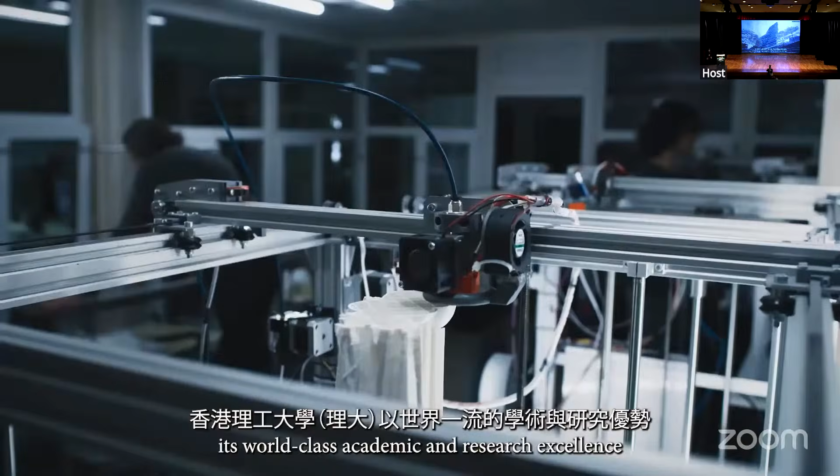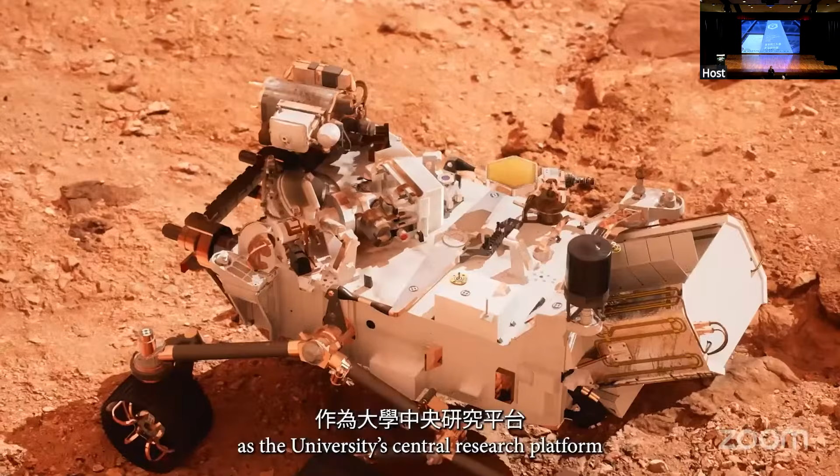The Hong Kong Polytechnic University, PolyU, leverages its world-class academic and research excellence to develop innovative solutions for a more sustainable tomorrow. In July 2022, the PolyU Academy for Interdisciplinary Research, PAIR, was established as the university's central research platform, dedicated to providing world-leading, interdisciplinary solutions to significant societal challenges.

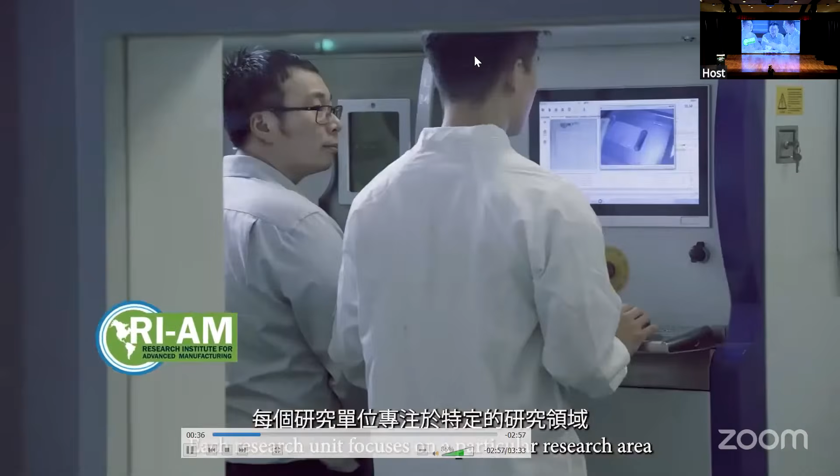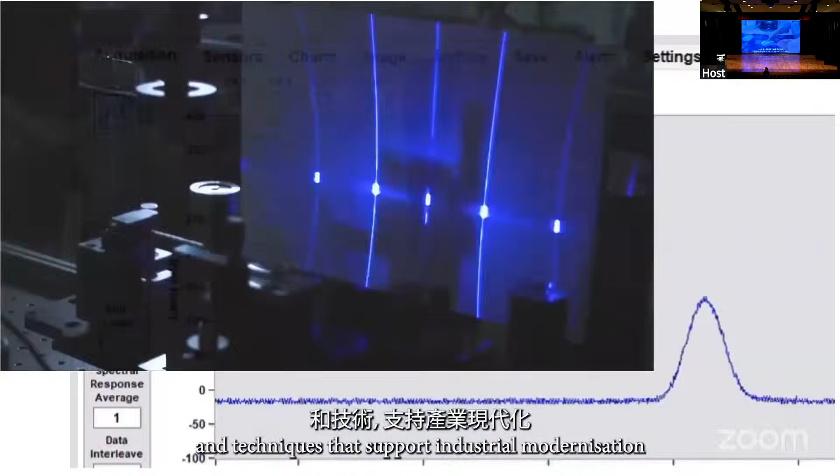PAIR is composed of multiple constituent research institutes and research centers. Each research unit focuses on a particular research area and is joined by researchers from various PolyU faculties, schools, and departments. These research areas broadly fall under three main themes, including advanced technologies and manufacturing, good health and well-being, and smart and sustainable cities. PAIR researchers develop new materials, systems, technologies, and techniques that support industrial modernization, upgrading, and transformation.

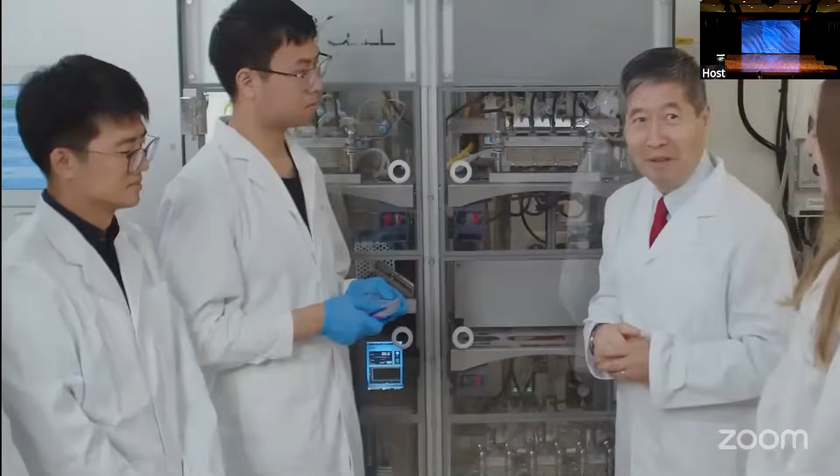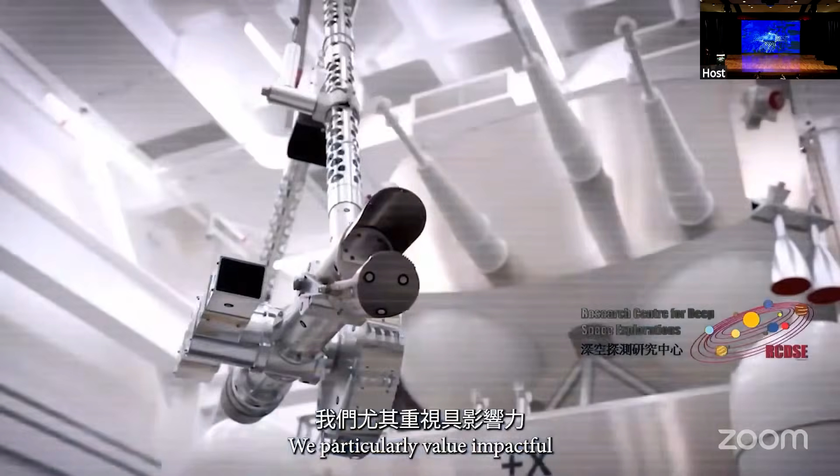They look into the factors and mechanisms influencing human health and wellness and develop evidence-based solutions, and generate smart technology-based solutions for making urban operations and services more efficient, connected, and eco-friendly. We particularly value impactful collaborative activities in research and scholarship. PAIR researchers pursue research collaboration at different levels. In addition to interdisciplinary collaborations within and between research units, PAIR and its units establish partnerships with industries, governmental bodies, universities, and other external stakeholders.

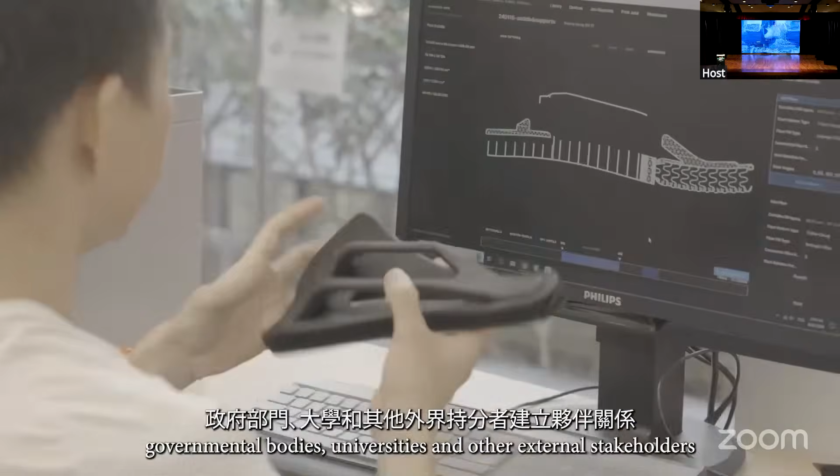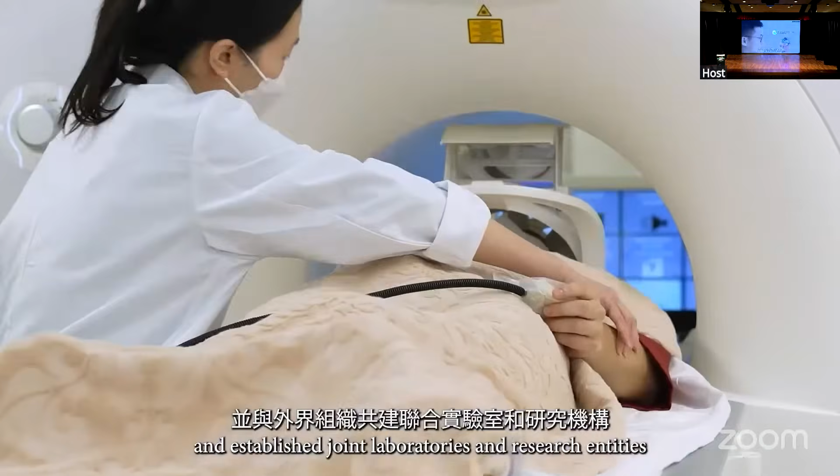With internal and external collaborations, we have successfully translated PAIR-led innovations into commercializable solutions and practical applications, and established joint laboratories and research entities with external organizations, driving scientific breakthroughs, innovation and technology development, and socioeconomic prosperity. PAIR's research excellence and research impact have been widely recognized at local, regional, and international levels. Our research outcomes have been published in leading journals, including Nature and Science.

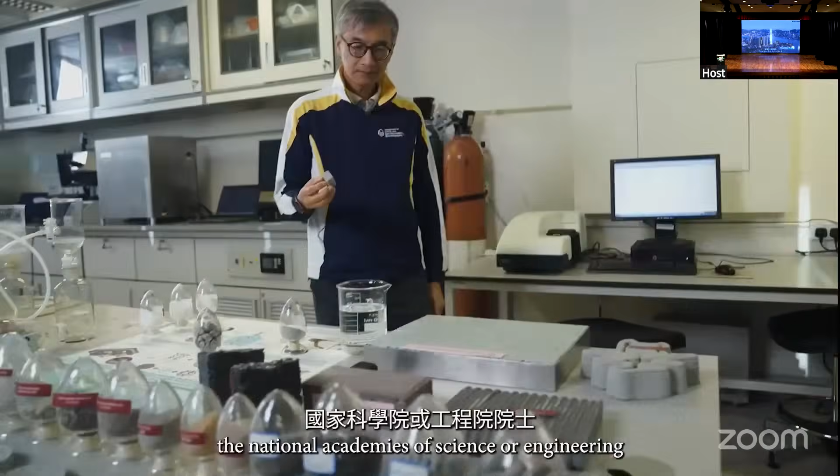Innovations led by PAIR researchers have won prizes at various competitions and events, including the International Exhibition of Inventions Geneva. Many PAIR researchers have been named among the world's top 2% most cited scientists in their own areas of specialty. Individual researchers have been selected to the National Academies of Science or Engineering and as fellows of professional associations, and have been bestowed with local, national, and international awards and honors. Harnessing the strengths of PolyU's research and world-class scholars, PAIR will continue our unwavering efforts in research and scholarship, knowledge transfer, and collaboration to develop impactful solutions that benefit Hong Kong, the nation, and the world.

Good afternoon, Professor Wang Zhonglin, Professor Wang Zuankai, and Professor Chen Qingquan. Colleagues, ladies and gentlemen, welcome to this PAIR Distinguished Lecture Series. You know that PAIR organizes this lecture series, and we often invite very outstanding academics to give lectures. And today we are very honored to have Professor Wang Zhonglin from the Chinese Academy of Sciences here. And now I would like to invite Professor Wang Zuankai, our Associate Vice President for Research, to give an introduction of our speaker. Professor Wang, please.

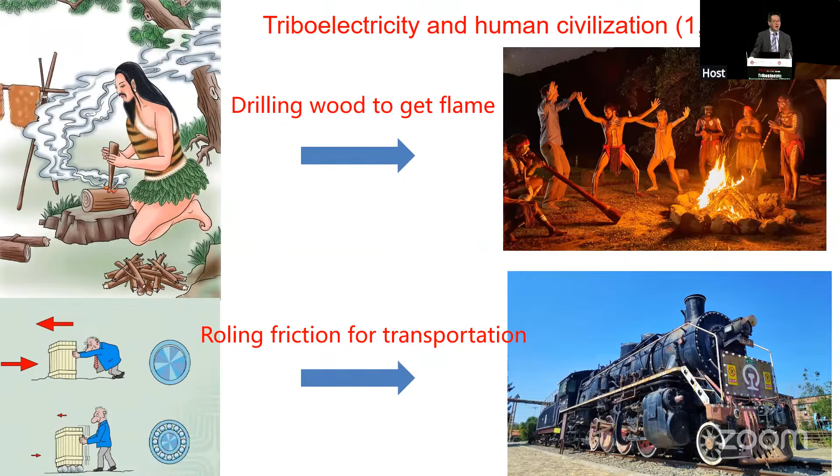Today when you talk about triboelectricity, a lot of us say, I know it very well. And of course, this phenomenon has played an important role in our human civilization, especially in the early days when we realized how to make fire, how to make transportation run smoothly. Through triboelectricity, people learned about electricity. And this is the beginning. We study static electricity, and it has been 2,600 years since the first record of triboelectricity.

And the fourth important contribution to us is you can see why flowing water will not deteriorate. You wonder about this phenomenon. Do you understand the physics and the chemistry behind why flowing water will not deteriorate? We know the phenomenon, but there's a chemistry behind it I will talk to you about today. It's just because nature moves, providing us with clean water to make sure all the humans and animals on Earth grow in health. So I will talk about the chemistry in just a second.

So this has made a major contribution to human civilization. Of course, people have studied this for decades, centuries. Because it's one of the earliest recorded phenomena, until the last 20 years or so, it had not been extensively studied because it used to be regarded as a negative effect, causing fire and other things. So people said, well, we knew it, but we don't want to study it in detail. So in the last 20 years, a lot of groups studied this in depth, especially, like the audience here, Professor Zuankai Wang's group and Professor Hao Jianhua's group, because it brings new technology and sense to us.

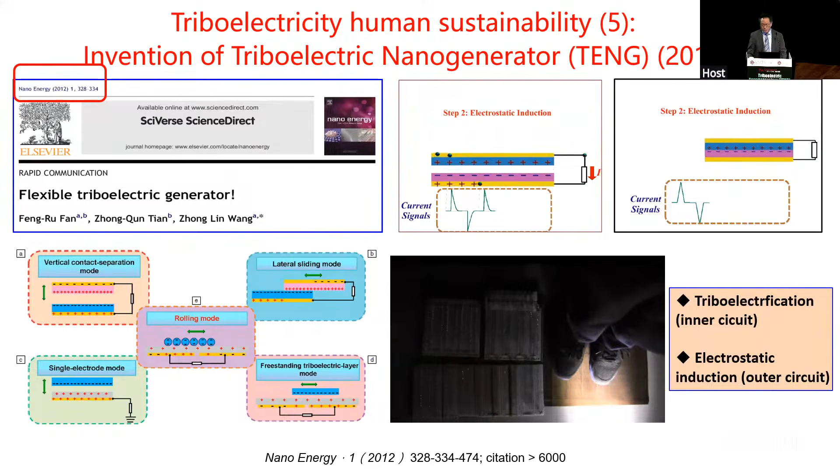We use triboelectricity as a power generator. You know that triboelectricity is a phenomenon. We used to say triboelectric discharge, but now it's triboelectric power. That's a different thing. So how it works is making two dielectric materials, one in contact with the other. So you cause charge on the surfaces. And if you use an external force to separate the two parts, you generate a displacement current, which drives the electrons to flow between two electrodes, and you give out power. So this was the beginning of this work.

Okay, up to now. So why is it different from the 200-year-old technology we have known so well? We use electromagnetic induction for power generation. This was first introduced in 1831 by Faraday, and this is the major thing we use today. Use magnets and coil. Its output voltage and current are each proportional to frequency. So the power is F squared. That means we need to run this power generator at a high pace. If you run at a slow pace, the output is very low. So it works best at high frequency.

But in our daily life, we have lots of slow motions, especially related to humans. So we use triboelectricity. It's high voltage, low current. The electromagnetic generator has high current but low voltage, just the opposite. Use different materials. TENG, triboelectric nanogenerator, uses polymer materials and contact electrification as the mechanism. Electromagnetic induction uses Faraday's law as the driving mechanism. So the fundamental mechanism changes, the material system changes, the output characteristic changes, and of course this results in diverse applications, right? So this is the basic.

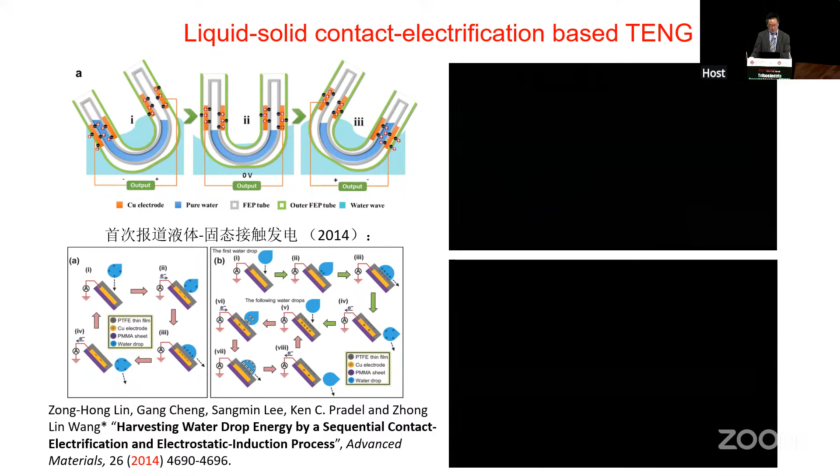And this started from a video we took. This was 2014, and at that time we used to study liquid and solid contact electrification. We found that we can have power generation, and we wrote the paper, and in 2020, Professor Zuankai Wang wrote another beautiful paper published in Nature on the liquid, with much more improved performance. This started work on liquid-solid contact electrification. Today, a lot of chemistry is being built around this. So as you see, this is the beginning study, fundamentals of liquid and solid.

Is there any charge transfer? How come a liquid droplet becomes charged? What kind of charge is it? Okay, so this is the beginning in 2014, we published the first paper on that. This goes to the fundamentals of chemistry, the so-called electric double layer. If you work on a supercapacitor, on energy storage, you must use EDL. Okay, this is the fundamental.

So it says when a liquid contacts a solid, a layer of ions is adsorbed on the surface. So our question at the beginning: is there any electron transfer? Why only ion adsorption? Is this the full model? After we studied, we found this is not the full model, but you read a lot in textbooks about that. So how do we do the study on this one?

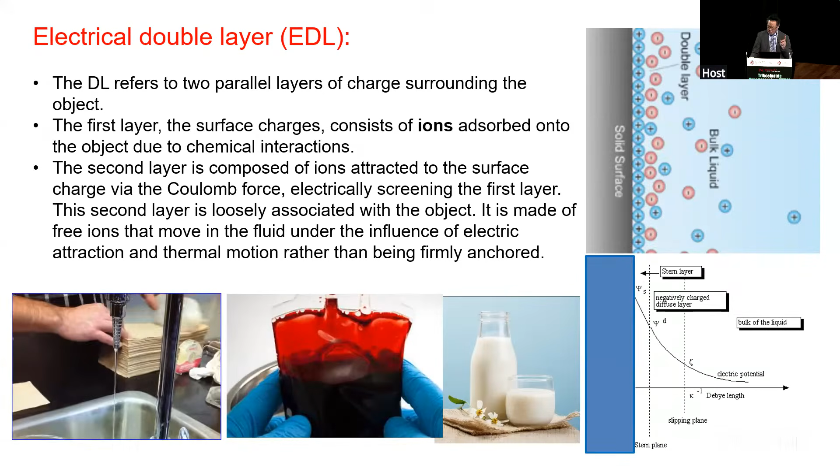You see, with the flowing water here, the charged plastic attracts it because the flowing water has charges in it. So what kind of charge is this? So we studied it in detail here. We use a silicon oxide, use thermal annealing to get rid of surface charge. Then you drop a single drop of water on that, you evaporate it. Then you measure the charge on the surface.

It suddenly drops from 0 to minus 800 microcoulombs per meter square, negatively charged. Then if you keep this stable at room temperature, it decays for a long time. If you heat up to 393 Kelvin, it drops like that, okay? But never reaches 0. If you heat to 433 Kelvin, it decays like that. So this residual charge is the ions adsorbed on the surface. The ones you got rid of by the thermal effect, called thermionic emission, are the electrons. So you can quantify how many electrons transfer, how many ions transfer.

So this is the first droplet. If you repeat this for the second droplet, you can rebuild the charge again, then after drying, you heat up to reach a new saturation. Since there are more ions on the surface, by the third droplet, fourth droplet, you reach ion adsorption saturation. So at the very beginning, if you have no temperature fluctuation, you have both electron and ion transfer. So this indicates the charge has both ions and electrons.

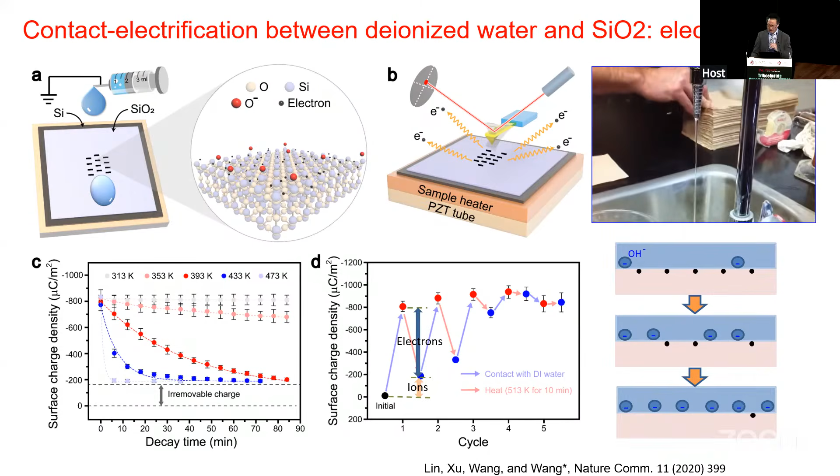But the electron transfer is much faster. Why? It only takes femtoseconds for the electron transfer from liquid to solid. Ion adsorption to the surface takes micro or even milliseconds. So much slower. Okay? So this is the beginning of our study, liquid and solid. Then you say, well, how come water loses electrons? Is this possible? We didn't believe this was possible.

But a few years ago, in this beautiful study, they used time-resolved ultrafast X-ray laser. They found water can become a water cation. The only thing is that its lifetime is on the picosecond scale, during which the water cation combines with one molecule to become a radical and another group. So water losing one electron is possible. So water is not just a solution that dilutes things. It participates in chemical reactions. We did not realize that before.

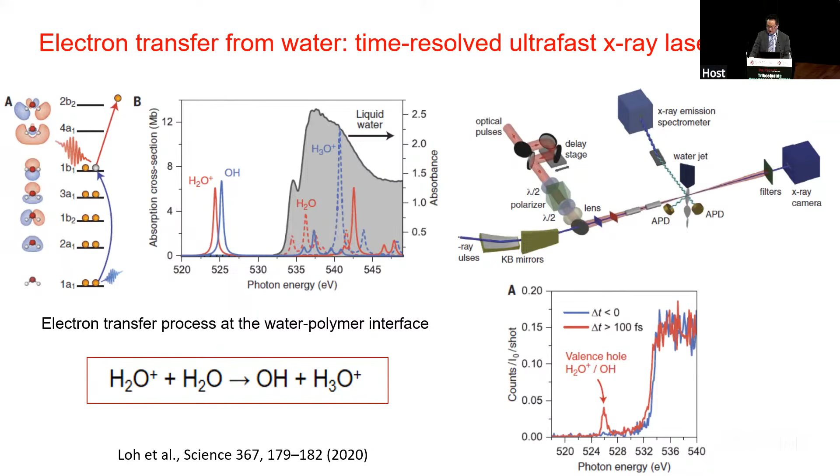Let me tell you how, okay? So this just shows electron transfer is involved in this one. As a result, if you have a virgin solid surface and put a liquid on it, first, electron transfer occurs very fast, in femtoseconds, finished. Okay, then the ions migrate to the surface to form a layer of ions. Below here is a layer of electrons and some ions. So what does this mean?

The formation of the electric double layer involves two types of charge, electrons and ions. We used to only believe it's ions. So that's number one. Number two, the formation of the electric double layer is a result of contact electrification or triboelectrification. In a solid we normally call it triboelectrification, but for a liquid and solid we call it contact electrification, which is more scientific. So this is the liquid and solid forming an electric double layer. And you can go a lot further with this study.

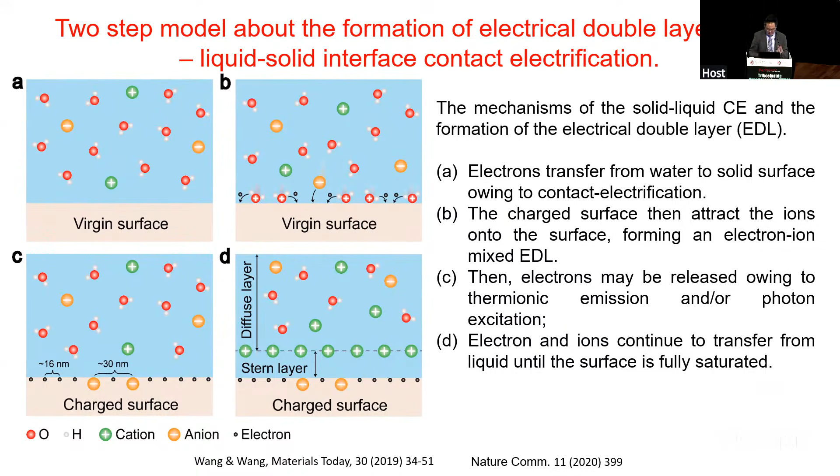As a result, you'll be able to study, if you have a droplet flowing down an array of electrodes, how to map the charge transfer between the water and the surface. How can you do that? You make an array of TENGs. Each yellow dot is an electrode. So you make a 432 array. When the liquid flows down here, you can measure the charge transfer.

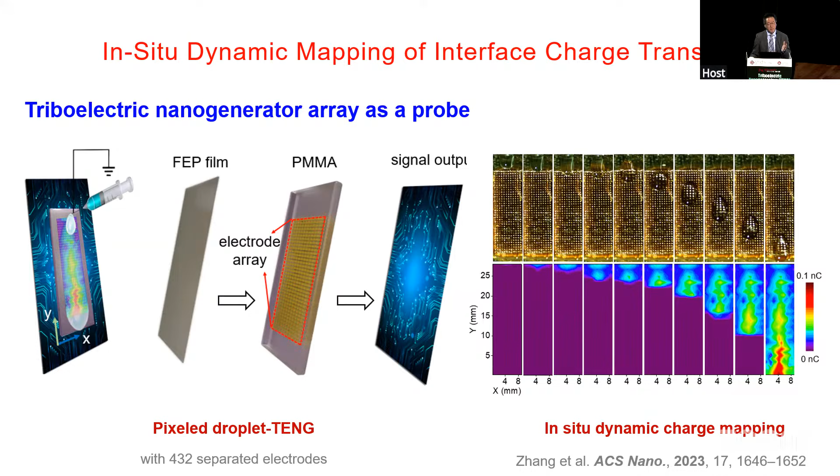So as you see, when the droplet flows down here, you'll be able to map the charge quantitatively. And you can heat it up and see how many electrons get removed. So TENG provides a new probe for studying charge transfer at liquid-solid interfaces. And I think this is important for chemistry, right?

Then why does flowing water not deteriorate?

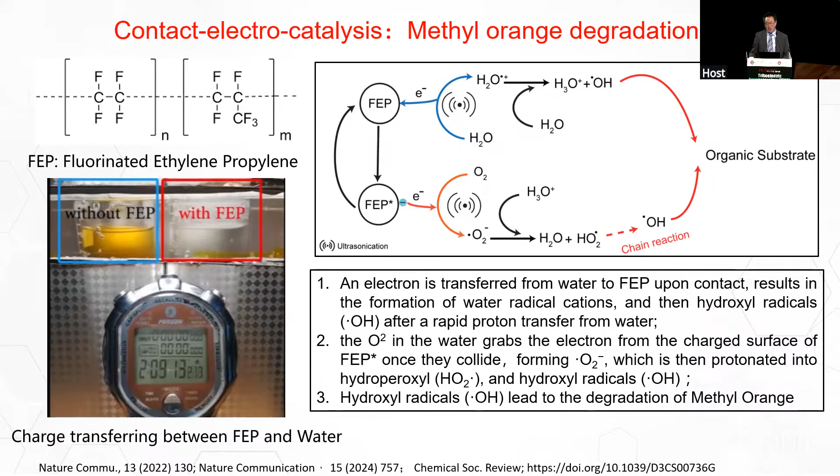You say we have photocatalysis, we have electrocatalysis. If we don't have photons, we don't have electricity, does catalysis occur? Yes, if you have motion. You have motion, it occurs. So this is why, in the evolution of our nature, a lot of things take time, because it is a motion-driven catalytic process called CEC, and this is now being widely studied. Okay, so this is the chemistry.

They ask, is the ultrasonic wave needed? The answer is it's not the only means. You can use ball milling, any physical motion, to excite this kind of CEC process. Using this process, we have recovered precious metals, recovered lithium-ion battery materials, and we also do a lot of food processing and many other things. So you can see there's a lot of work being done around the globe in this field. So this started a new interesting field in chemistry, right?

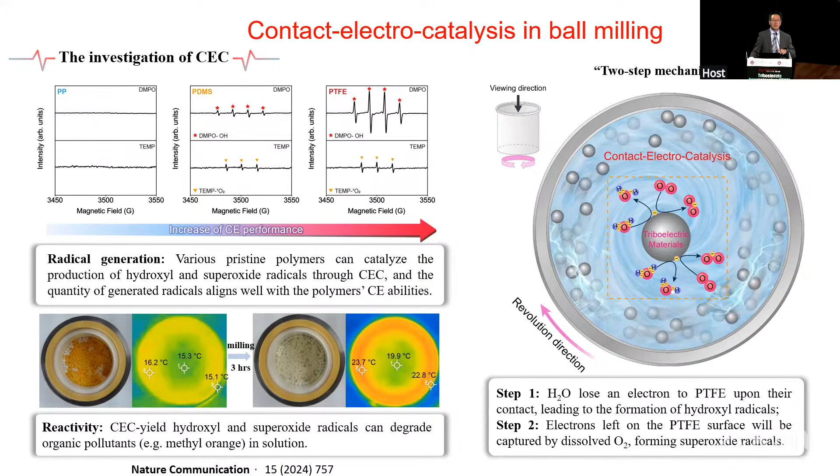Also, recently a lot of studies use microdroplets. The magic of microdroplets is the charge transfer. It's due to contact electrification. Number two, as the droplet becomes smaller, the surface charge density becomes larger, so the electric field on the surface becomes larger. That can cause some chemical reactions. But what causes this electric field is the charge transfer on a liquid droplet. So when you look at it fundamentally, contact electrification is the basic mechanism.

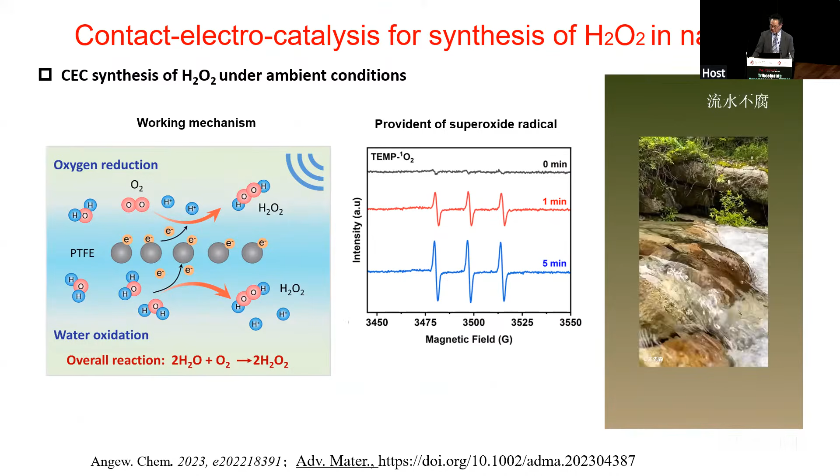All right. So now you understand why in our nature flowing water does not deteriorate, and this is the nature of clean water. Okay. So this is for the chemistry side. Now let's talk a little about physics.

Physics, first one: we knew contact electrification for a long time, but why did it happen? People doing tribology study say this is material species transfer. People doing chemistry say ion transfer. People doing physics say electron transfer. Which one is which? They have debated for many years. But in fact, we find both are electron transfer and ion transfer, depending on the environment you are involved in.

The basics: we found using AFM measurement that contact between two materials only occurs when the distance at the special region is shorter than the bonding length. Why? We measured it and found you have to be in the repulsive region. That means the two atoms have to be so close they have a strong overlap in the electron wave function. Only then does the charge transfer occur.

So as a result, we propose this potential well overlapping model. When your two atoms become so close, the barrier between the two will be reduced, so you have a strong overlap of electron cloud. As a result, you can have a charge transfer from one atom to the next one. So it's transfer and a transition. I will show you the evidence supporting this in the next view graph.

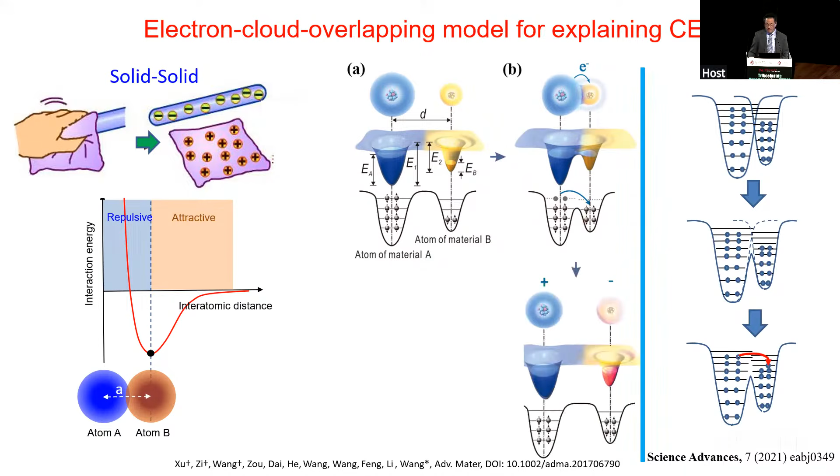Because you have a transfer and transition, you're going to have a photon emission from this transition, and we observe that experimentally. So if the charge transfer has already occurred, when you separate them, there is this negative charge and this positive charge, but thermionic emission eventually reaches equilibrium. So that's the nature of the curve. Okay, so now let's look at the evidence to support this.

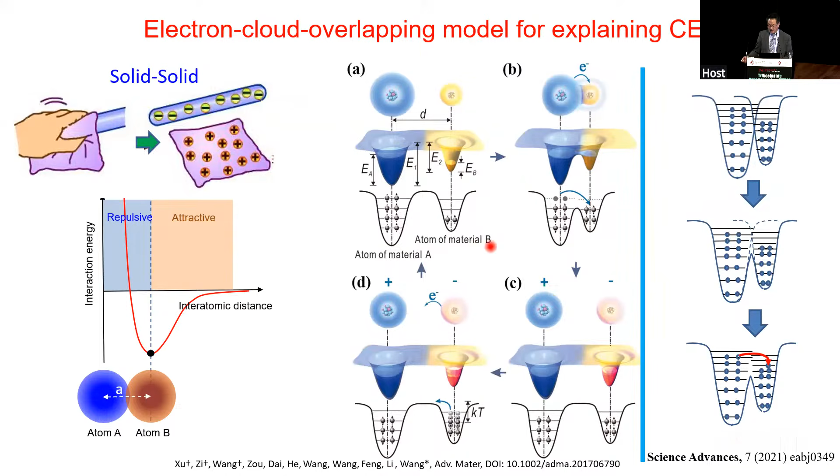In order to do this, we built a system using an FEP film and a quartz film, and we make contact in vacuum. We observe photon emissions, but with photon emission you have to be careful. One is the arc discharge due to the air around it. The other one is truly atomic spectrum emission. And we do find the line width is very narrow, 1 nanometer or so, and the position of those lines fits well to the interatomic orbit transitions, as we expected.

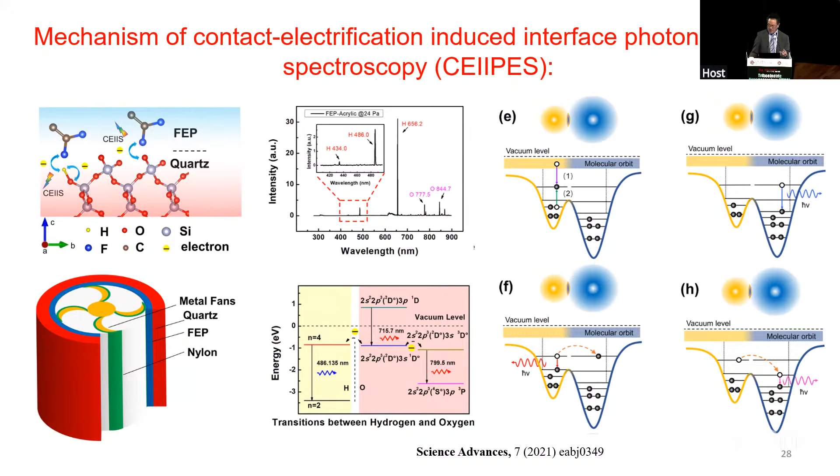So after careful study, we find this does occur. The electron can transfer to one atom, at a lower state, and you get the emission from this atom. This is the number one path. Number two path is this charge can transfer to the neighbor and drop down, and this also can occur. So we observe both photon emissions as a result of contact electrification. It's an indicator that truly, at the very beginning, electron transfer is dominant. So this provides a fundamental understanding of the physics.

The second one is that we have done TENG for over 10 years. Can we quantify the output? Can we make predictions? Then I started work on a theory for that. If you work on major power, the theory is well established. However, what we do here is not established, because we have medium motion around us, which causes problems.

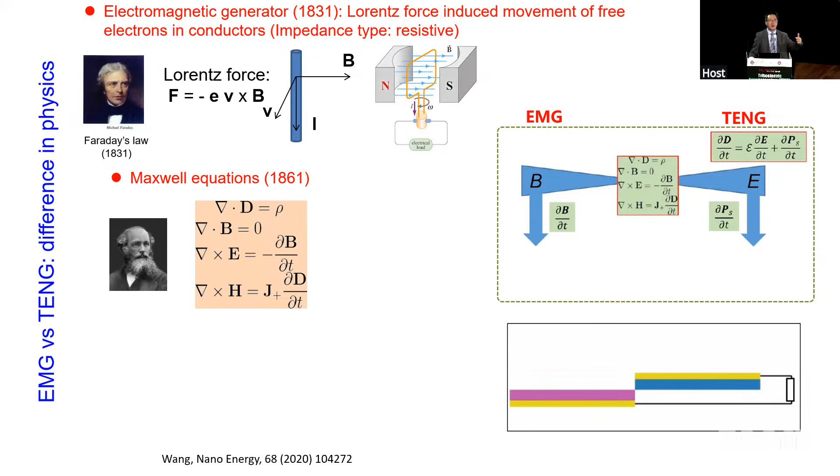This set of equations is called Maxwell's equations, developed 150 years ago. But this set of equations was derived assuming stationary boundary and medium. That means nothing moves, only electromagnetic waves back and forth. That sentence is rarely written in a textbook, so a lot of us don't know about it, and we just carry on. Displacement current is different from conduction current. Displacement current is not an electric current of moving charge, but a time-varying electric field. That means time-varying electric field plus medium motion.

Now in our system here, we have the medium moving. This changeable boundary condition and changeable medium configuration during the process cannot be easily adopted in those equations. So we have to introduce an additional term due to medium motion in the equation. This is a long story, and I don't have the time to cover how we derive the equation, but I'll just show you the results.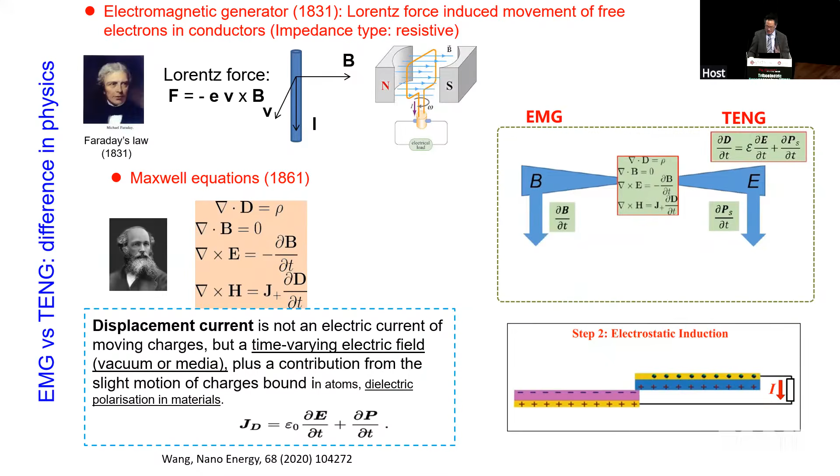If you work in the power industry, you use this Faraday's law: the changing rate of magnetic flux through an open surface is the electromotive force. And this has two terms. One term is

This pointer is not as nice as I expected. Okay, sorry. All right, you don't have a cursor, do you? Okay.

The first one is the field change. You see this, the field change. The second one is the motion. I don't need to use this one; it's the motion, I just use my words. Okay. So you work on that. That's fine. However, if you work on the electromagnetic field on the right-hand side, which is what? You do the electromagnetic wave. Nothing moves in the medium, nothing moves, but the magnetic wave goes back and forth.

These two sets of theories were derived on different assumptions. In Faraday's law, you must have medium motion. In the Maxwell equations, no medium motion. So how can you merge the two together? You have an additional term. The additional term appears right in the equation here. Okay, maybe better. Oh, sorry. Here, right. That appears. It is a non-linear term. So we introduced a non-linear term.

Do you have experimental proof for that one? Very recently, we have done an experiment. Let me show you this non-linear term here. Let me first show you: the Maxwell equation itself is a linear equation. That means what? If you have an excitation source with frequency omega, the output electromagnetic wave is also omega. You can't have 2 omega, 3 omega for a linear system, for materials here.

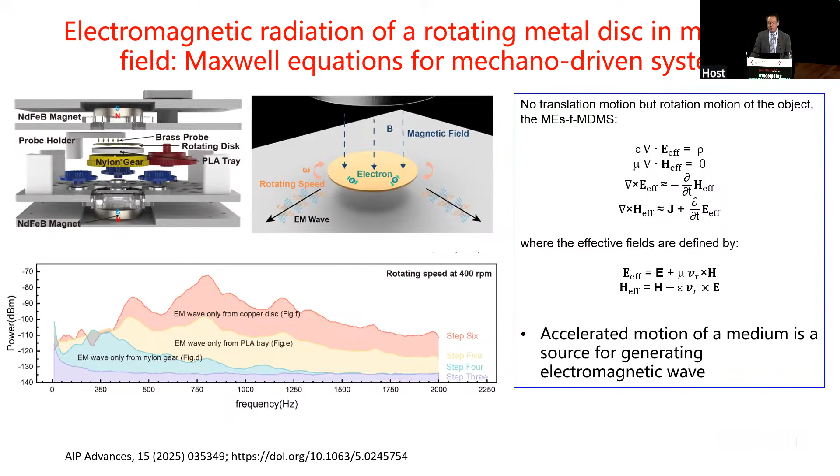However, the experiment we recently did shows something different. Let me show you. This was the beginning. We have a metal disk rotated in a magnetic field. Besides the rotation frequency, it gives us a radiation right here. We have an additional term. This is a metal disk. It has turbulent current induction within the disk, and this current gives more addition to the electromagnetic wave. So this is the first paper we published.

Most recently, we did another set of experiments. I think the result is really beautiful. We use a dielectric disk, rotating. With the rotation, the surface has a charge, so the current goes like that. You'd suppose you have electromagnetic radiation with the same frequency as the rotation of the disk, right? That's what you expected. However, if you look here, if the frequency is 13, we have 26, 39: twice, 3 times, 4 times. Around 50 is the frequency of the AC power for measurement. So these multiple harmonics appear.

The appearance of multiple harmonics is a result of this nonlinear term right here. Otherwise, you cannot explain it. So this set of experiments proves the nonlinear term we introduced is truly valid, is correct. You just did not do the experiment before. If you do the experiment carefully near a power generator, you have multi-harmonics. You measure it, okay? It also causes noise for electronics.

So therefore, a lot of things we're just used to, people say, yeah, we can use this one, but think twice. A lot of things we're used to have assumptions behind them. Is this assumption valid here or not? So we have to rethink that. This is just a recent result which we received. So the appearance of multiple harmonics is a support for this term.

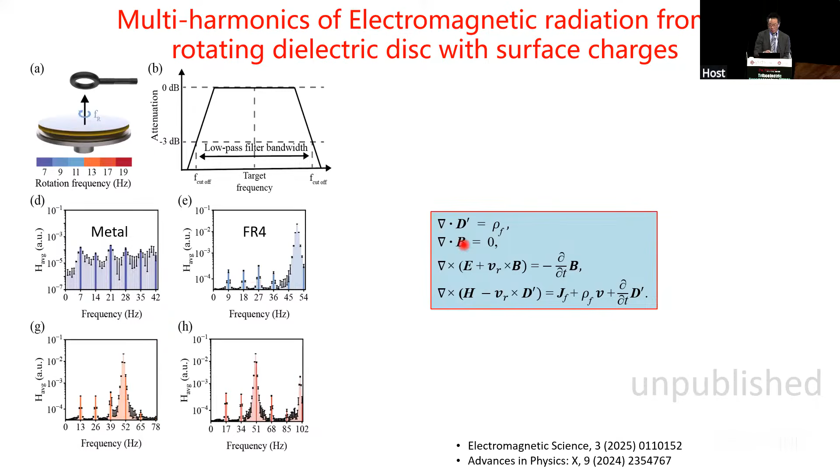Okay. The second data is that if you have a disk running like that, you expect the magnetic field to go like that. If the disk runs the other way, you expect the magnetic field to go the other way. You anticipate that if the rotation velocity reverses, the field reverses, right? That's normal. However, we find those harmonics do not exactly follow what I expected. For the first harmonic, third harmonic, the odd orders, 1, 3, 5, you have a 180-degree reversal in the field, as expected. However, for the second, fourth, sixth harmonics, you do not.

This cannot be explained by classical electrodynamics unless you introduce the additional term we introduced. Because why? It has V. If V reverses, this reverses, but this preserves its sign. So for the second harmonic, you have no reversal, because V multiplied by V: negative times negative is positive. So therefore, this phase change gives another support for the additional term introduced into the Maxwell equation.

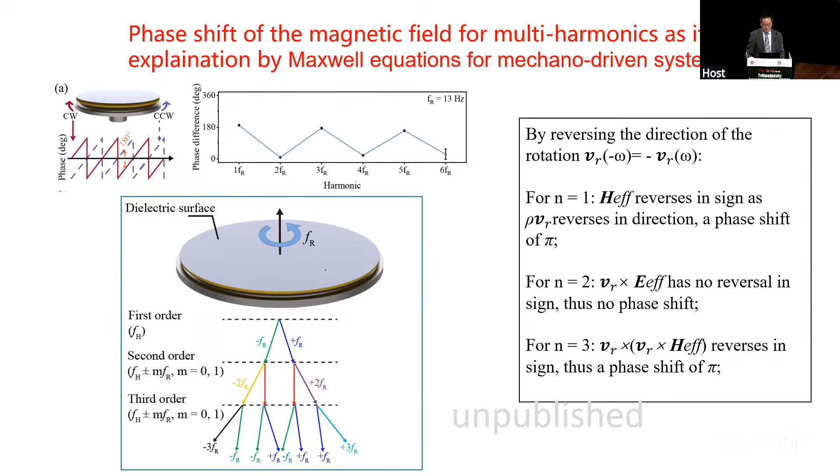We'll have a lot more results now. A lot of things we did not understand previously is because we did not do the experiment as we were supposed to. We only looked at far-field electromagnetic radiation, but if you're near the object, you see those things. Okay, so I just spent a little time on that one, and now comes the fun part. It goes a little fast. You say, well, application where? You have a broad range of applications. Let me just tell you where you're going to apply it. First one, medical science. Anything with motion.

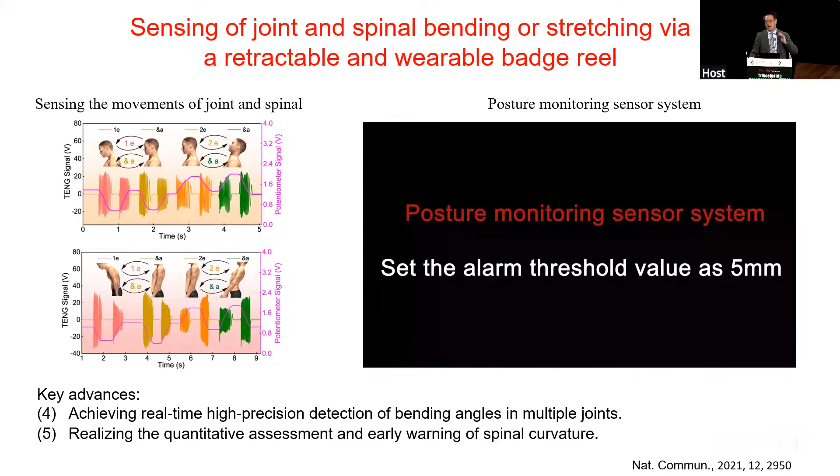Okay. Secondly, you know when we work in the office, we always bend down writing things. So our neck suffers and the shoulder suffers, and we can do monitoring of this. You can monitor the whole thing, physically, how you behave, your body, your shoulders, your neck, everything. This will become a self-powered sensor for health recovery and health care, right?

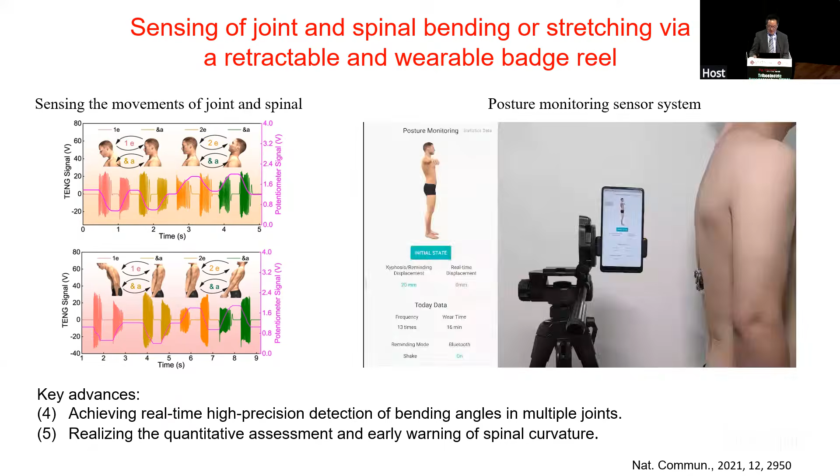So a lot of things you can develop from it. As long as there's motion, there's a signal. That's called a sensor, right? And you can make this as a patch, 就是那个中医的药片儿, a Chinese medication patch. You can make this breathable and wearable and also comfortable. You can put it on here.

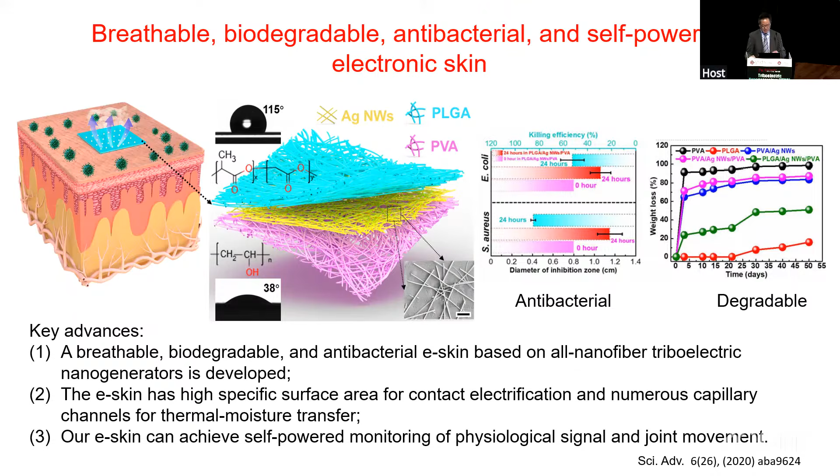So if you rub it a little bit, the electric field generated can infiltrate the skin for a few centimeters, and can deliver the drug 5 times as effectively as with no rubbing on the surface. So use this for drug delivery of Chinese medication on the surface. Okay, so this uses the rubbing-generated field.

The other one is that you can have these patches put on different parts of your body for pain relief, for headache, for other things. Big help for that. So we have a lot of things developed around this for medication, using AI for medication, Chinese medication as well as medicine. So hopefully more digital data is going to be produced in the next few years or so.

So this is called self-powered electronic skin for healthcare, right? And the second one, smart sports. Sports have a lot of movement, and sports have a lot of things to be monitored. Equipment for sports, training of athletes, training for all kinds of different athletic sports, also post recovery, motion.

So this becomes a new field in smarter sports. All right. So as a result, TENG is naturally born for that. As long as you move, there's a signal that tells you how to recover. So we do this for any motion. You ride a bicycle, you jog, you kick a ball, you swim, you play badminton, whatever you do. And this is one of the early works we published 6 years ago.

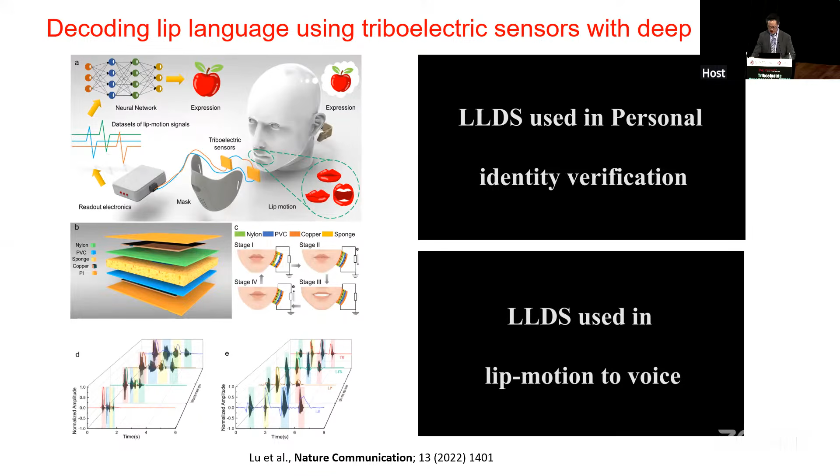Oh, sorry. Let me go back. Sorry, there's a little delay. Okay. Anyway, let me see if I can do that again. All right. Let's see. It's a little delay. All right. Okay.

This is the "Open Sesame." The second one is just the throat vibration. We can use this: "Open Sesame." How can we do that? This uses an AI-assisted system here. So you can put the sensor on different skin parts. When you're talking, the muscle moves differently. Using this, you can reconstruct what he or she is talking about, right?

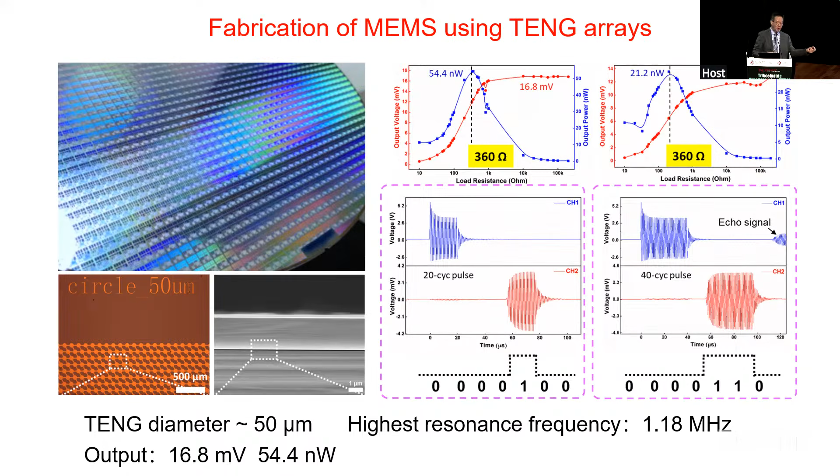And furthermore, you can make it small. You can make a MEMS device as small as 50 microns, and the mechanical response frequency is 1 megahertz or so. So for MEMS, you do not have to apply an optical fiber or electronics to measure the MEMS output. This gives you a signal automatically. So not only think about big, also think about small, so you can integrate with microelectronics here, right?

Okay. Smart fabric. Now we have many faculty at Hong Kong PolyU working on fabric, Professor Shaw and others. Fabric is a big industry. Can you make fabric have some kind of functionality? Fabric is great for triboelectricity.

So you are able to do this 3D weaving. Then you can contact two different fibers. When sliding one against the other, triboelectricity occurs. You can make a smart sensor patch. You can make a smart jacket. As a result, you can have substantial power generation, not only as a sensor but as a power generator. This is a small patch, only about 2 by 6 centimeters in area, a little smart patch.

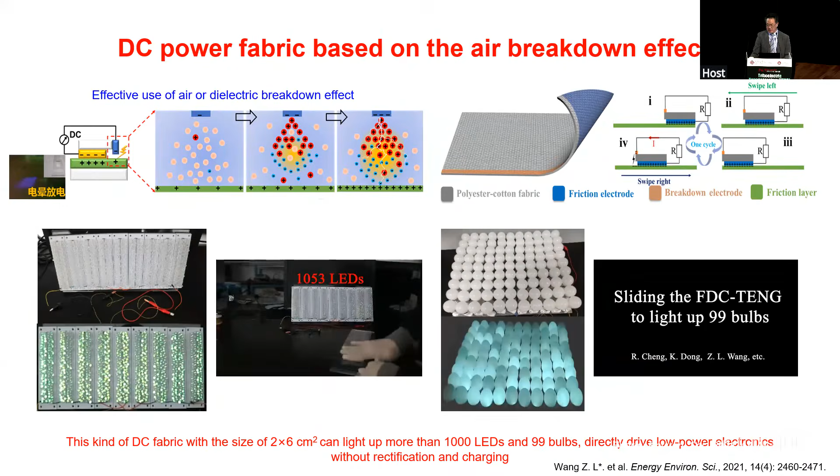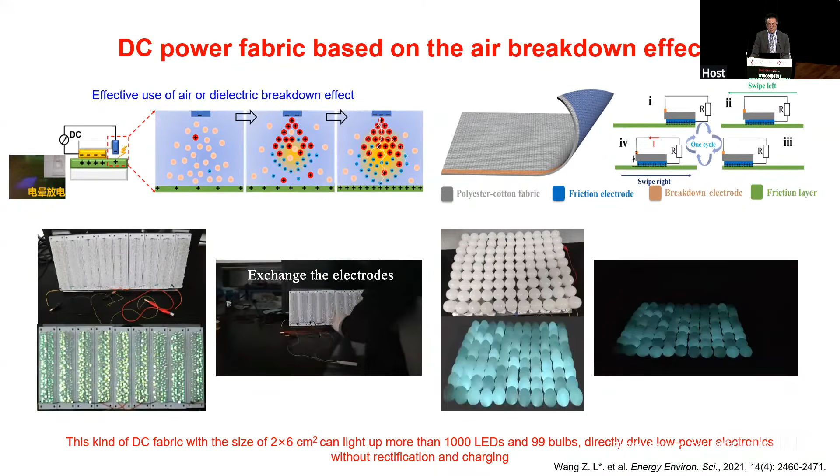You're sliding it on the surface. This is 1,000 LED lights flashing immediately. And if you have commercial bulbs, each 3 watts, sliding a 2x6 little patch on a surface, all these lights can flash instantaneously as well. Of course, this gives you not only instantaneous power, but also self-powered sensing. So you can use any material, and this plays an important part for smart fiber, right?

This field is fast expanding, and many groups work on it. We even have a recent book on smart fabric using TENG and textiles, because smart fiber and fabric have broad applications, from sports to daily wear, from medical to a lot of infrastructure. You have reinforced fiber for composite materials. All these things need this. So there is a broad range of applications. I will not cover it in detail, just give you a flavor.

Aviation. So if you fly, you always experience turbulence. What is this used for? Of course, you can simulate, but you need to measure. How do they measure? You can see this is a simulated cross-section of the aircraft wing. You can see the turbulence occurs. Let me show you how.

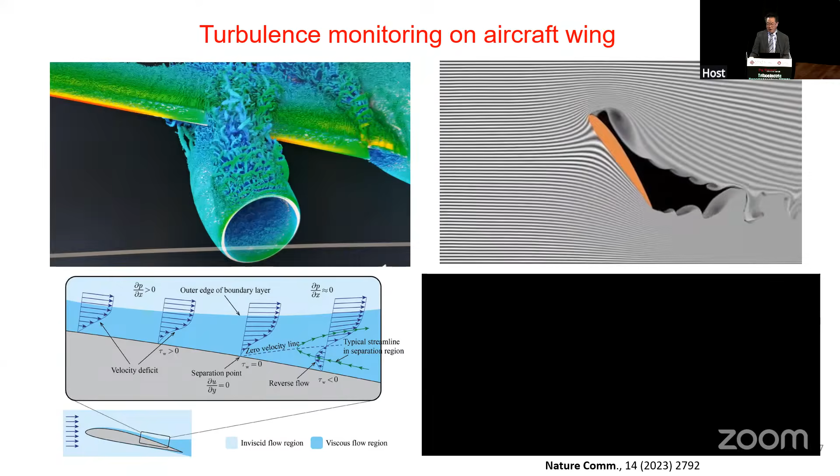And then how do you observe that? You can use the flying strings on the surface of the aircraft. This is the hardware monitoring for that. So it's non-digital, non-scientific, and not accurate. So we use TENG to fabricate

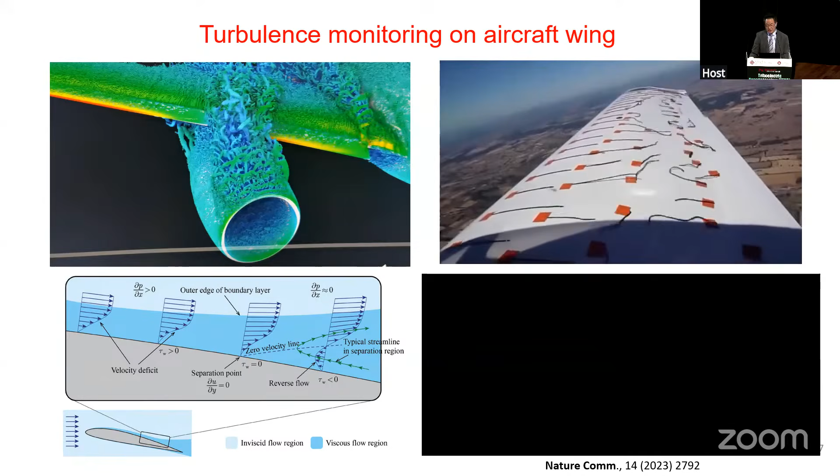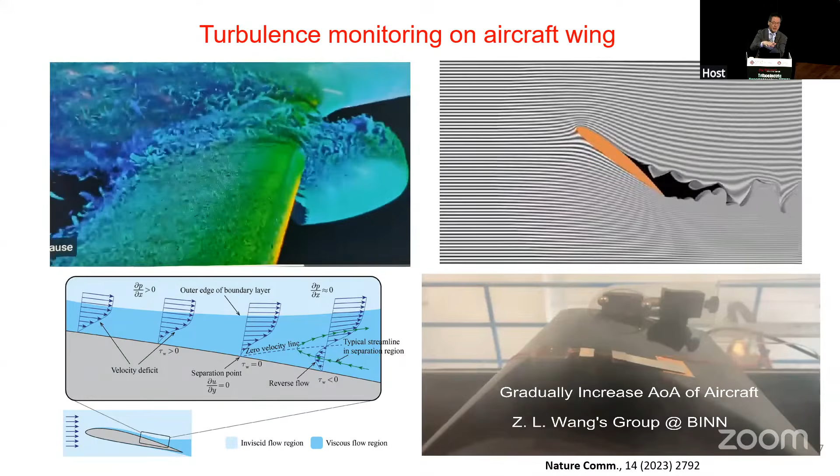this turbulence measurement system. Why we can do it is because the lift of the TENG gives you the voltage. The voltage amplitude is the lifting. The current gives you the speed of the lifting. So using this technology, you'll be able to monitor a lot of things, and this has now become even commercially viable for flight safety.

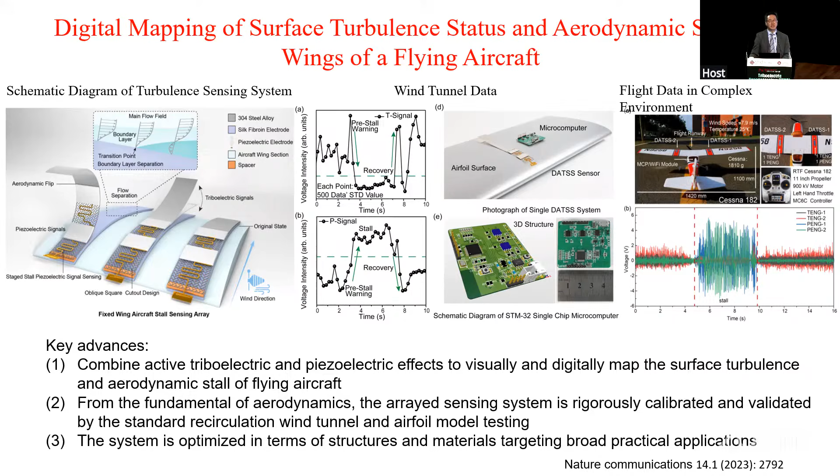Okay, and you can do big data analysis. You have sensors across the wing. You can detect the local turbulence very precisely and do AI for measurements. You can provide a safe flight and control system for that. So I think many people can work on this one, using it as a completely new sensor system for aviation.

And also we have collaborators who work on UAVs, because the materials make all the structures super integrated with a very functional design, using 3D printing. But inside the 3D printed materials, how do you measure the shape change, twisting, and other things? It requires sensors. So we built this inside the composite materials.

As you can see, with this kind of material, you can measure the clapping of the two sheets and the compressions, and you can do good measurements. I'll just give you a flavor here, and you'll be able to read those papers in detail later. Okay. So this is for aviation.

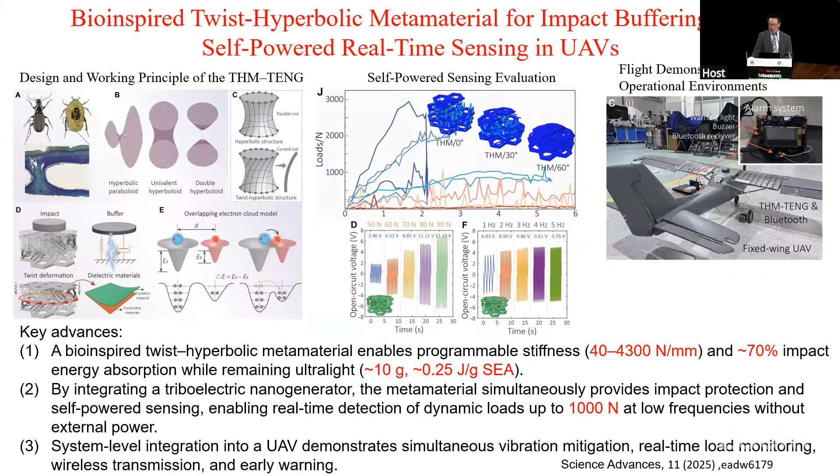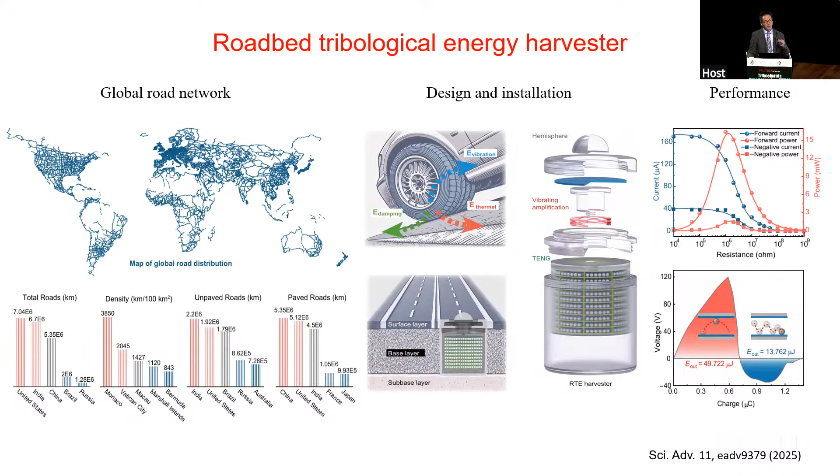Okay, now civil engineering. You can use it for what? You can measure the smart road. So when you're driving, you can put it on the floor, the floor is vibrating, and you can use this for measuring and monitoring. So this shows you, okay, they put it on the floor here.

If you're a car driver here, you can do a lot of monitoring of the condition of the road without additional power, because the car movement is a source of power. Either use the vibration or use the compression provided locally. So this is using the smart road for safety monitoring.

Furthermore, this can be used for the intelligent mining industry. You know, underground mining for coal, minerals, and other things. You can use this for monitoring particular gases underground, which is sometimes very dangerous for the miners. Wherever you have airflow, the slowest air speed we can use is 0.3 meters per second. Such a breeze can power measuring the local concentration of specific gases, using the generator as a source of power.

And I think this is important for a lot of cases when you work in a complicated environment. If you visit some coal mining places, it's very complicated underground, right? So this is for mining industry applications. Agriculture, you can use it for agriculture.

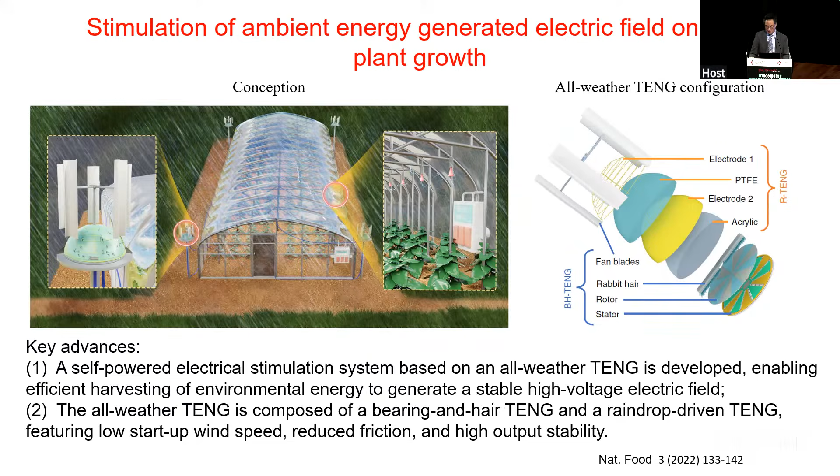And we found it interesting that if you apply an electric field to plants, their growth rate changes. This turned out to be an exciting field for smart agriculture. As you see, with no electric field versus a heavy electric field, or a magnetic field, the growth rate is different. So the electric field not only stimulates biological systems, but also stimulates plants.

So therefore, people have studied this to try to enhance the growth rate for agriculture and also for smart monitoring. So I just use a couple of slides to show you that.

Now I've shown you many things, but you may ask, is there anything commercialized? You say this is potential, that's potential, a lot of potential. How much potential have you delivered, right? Okay, so we have some products I want to tell you about, and also we have companies registered, just starting.

We encourage young people to be engaged. They start companies, so hopefully they can make this. You see, use the self-powered pacemaker, right? This used as the robotics. Many things started from that, but we just have a lot of opportunity to offer.

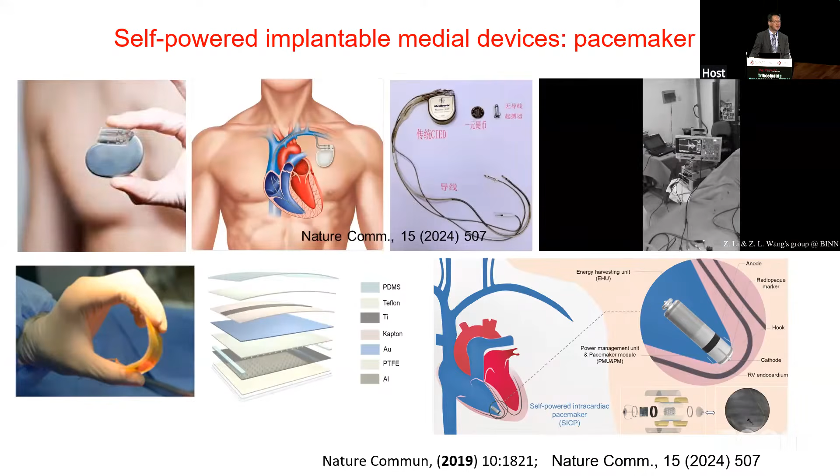Okay, now let me give you examples. Self-powered pacemaker. We worked on this one for 13, 15 years. 5 years ago, for the first time, we made the pacemaker self-powered, and we spent 11 years to do that. This opened the door for implantable medical devices. As a result, a company was born from this technology. So you can see this opens doors for medical science.

Keyboard, a type of keyboard. If you make a keyboard that not only records what you're typing, but the way you're typing, so when you punch the keys, they record the signal. Big data can analyze the way you're typing. This can provide a new approach to social behavior, the way he thinks, she thinks, dynamics. So this one is also at product scale.

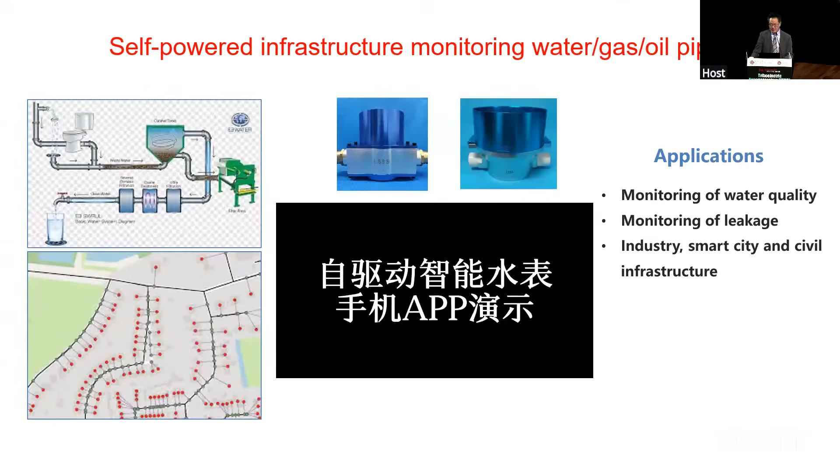Furthermore, each family has a water meter to measure how much water you use. We can use the flowing water to measure the pH, flow rate, pressure, any kind of chemical change in the water as one system. Each family is a unit giving you data. You can analyze the quality distribution of water across Hong Kong and other places.

You can also apply it to the heating system in the northern part of China. They have supply heating, and sometimes a pipe bursts and they don't know where it is. So you can measure this, use big data to analyze: here's where the burst possibly occurs. This one is already transferred to industry. It uses the flowing water, so you don't have to change the battery anymore, and gives you data every few minutes, for infrastructure monitoring.

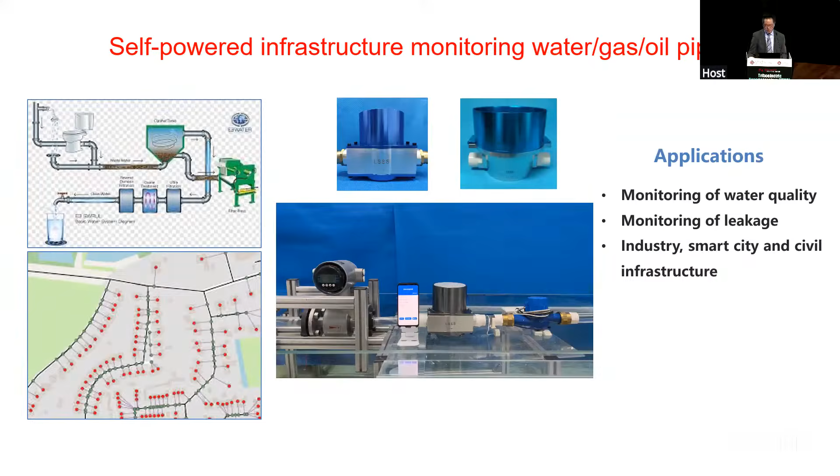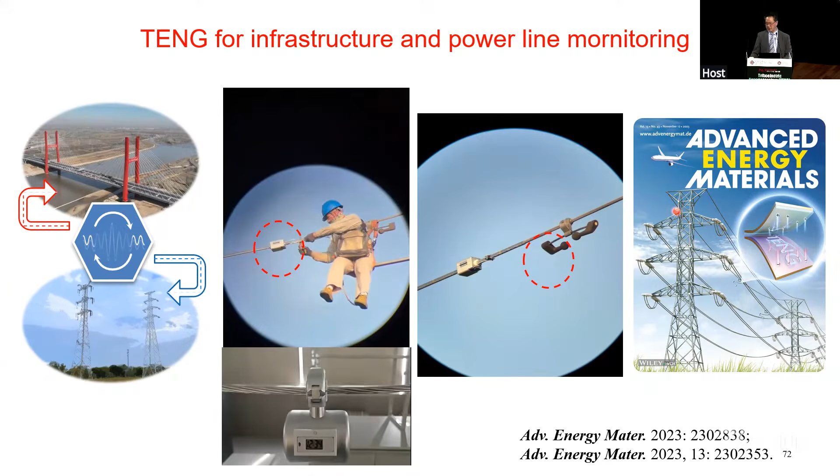Also for high power lines, we use this to measure the vibration, the temperature, vibration amplitude and frequency of the power lines. This is already commercialized as well. We use the power line vibration to do the monitoring locally. So this is just the beginning for the power industry. Oh, sorry. Okay, this is the one for vibration.

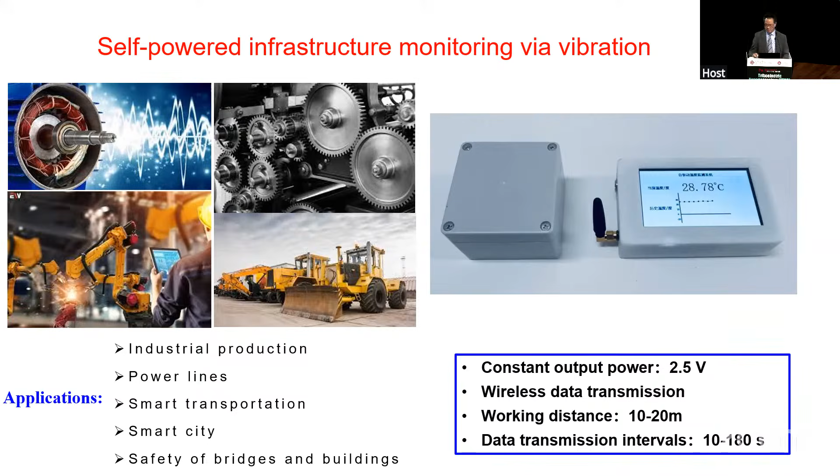Vibrations are everywhere: big machines, trains, subways, anything. If you can monitor the vibration amplitude and frequency, you offer a lot for the safety of transportation as well as infrastructure. We built this a few years ago. You have to have a power harvesting system that responds to a broad range of spectrum, not just a narrow one. Piezoelectric is too narrow; it only responds to a specific frequency. For broad frequency, TENG is much better.

So, lastly, can this contribute to the sustainability of humankind? Something big, not just small. We work on carbon neutralization projects. According to a report from Chinese and European chemical sciences, they projected that the future solution to climate change is ocean energy substituting fossil energy. This sounds a very ambitious goal. Is this possible? If possible, how?

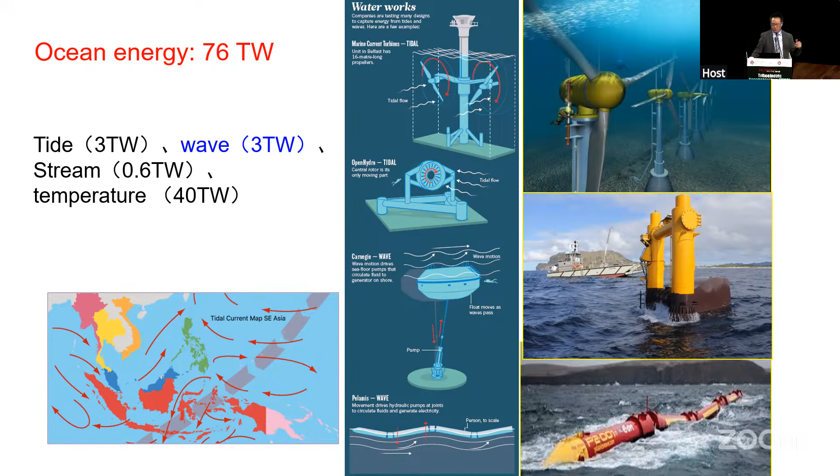The ocean is so huge, it offers a lot, but the utilization efficiency is very low, very expensive, and very complicated. Especially near the coast of China, the wave amplitude is less than 1 meter on average. It's low wave and comes very slowly. At such a low pace, traditional technology cannot do well. So how do they do it? This is the accelerated plate, which uses the wave to push, installed only where the wave pushes one way. In the middle of the ocean, the water just randomly circulates.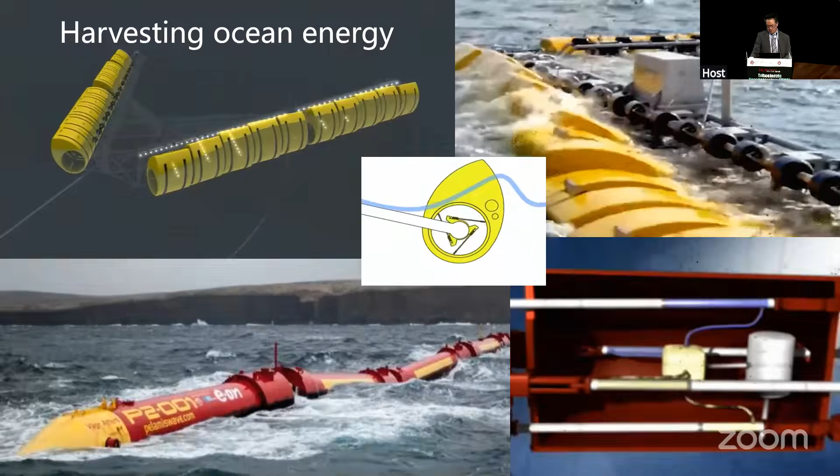So more than 10 years ago, I started an idea. When I wrote this article, I said, can we use TENG as an array to do this? At that time I said, we can make a TENG ball, inside the ball. My students, they are here, did some of the early work on that. So is this possible? Just as an idea.

So we call this blue energy because the water color in the ocean is blue. So we call it blue energy to be distinguished from green energy. Okay, this is possible. So this was just an idea, 2014. And then because this wave from the ocean is gravitation, it's there all the time. But we have to learn how to utilize that. So this is the idea in 2014.

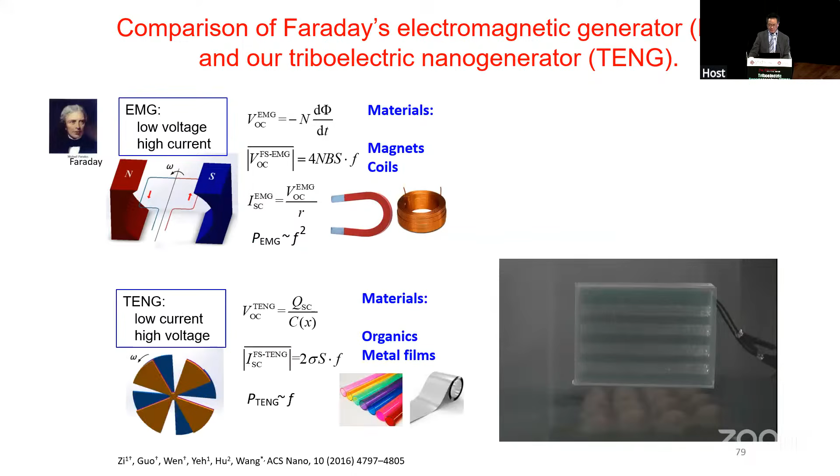I wrote an article: why we can do it, why traditional technology is more difficult to do it. The reason is because at a low frequency, the response of ours is much higher than EMG. So you can have some power delivery. And also this device floats on the surface, so you don't sink. The density is lower, so therefore it's floating on the surface. So we want to make a nano network.

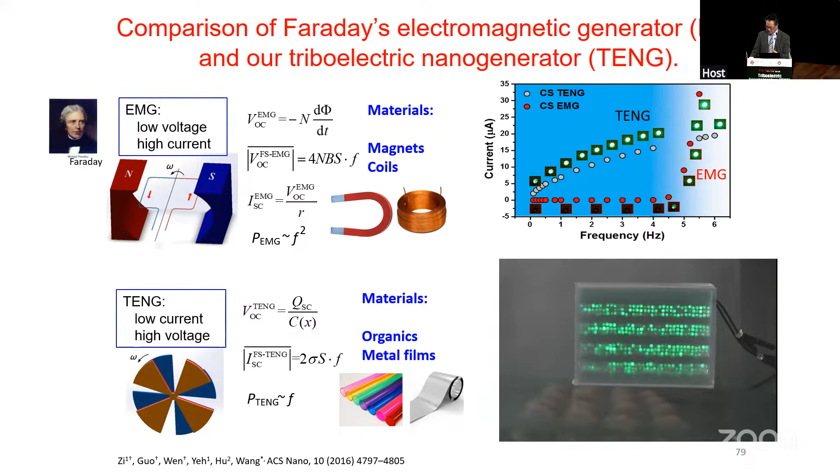So after 10 years of effort, we eventually made this one, 1 cubic meter. And we reach up to 120 watts per cubic meter volume. You think this is probably small, but in the conditions in the ocean, any random motion, it's very hard to harvest energy from that. So if you have a floating tank like that, wobbling in any direction, we can do so, right?

So this is now being tested in the ocean, to see if we can make this light tower self-powered. The answer is yes, we can do it, and we are testing. You see, this is the testing, real-time video. Let me see if it will play. Okay, yeah. This real-time flag right there, and we already reach up to 200 watts peak power from this one. So it's slowly working, but took 10 years to get to today, right? But I think in the future it will be faster.

You think about nanogenerators, look, all the people come to my institute: where's nano? Let me take a look. Nano materials, right? Integrated nano can become big. The name was born because we were on nano materials, nano devices. We call it nanogenerator. But today you don't have to be small, right? This is the history of nano. So with this one, I think there's a lot of potential for the future as well. The covering scope is very broad.

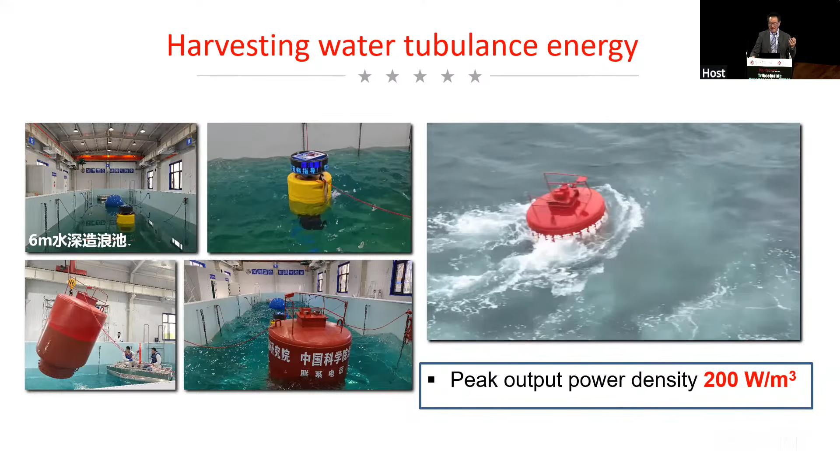Next one. How do you solve the world energy problem? Not one technology can solve it. Can you integrate wind? Sorry, let's go back. Press twice. Back. Oh, here we go. Wind, solar, and water energy. Can you make it? My PPT is very big, so the computer is tired.

So you can see wind, solar, and water all together. We call it hybrid energy. Can we use this one? This is possible. So we work with a company to do this on the ocean right now. So hopefully we offer a comprehensive approach towards sustainability of energy for the future.

You may think this is a long way to go. Yes, absolutely, because we are facing one of the most difficult challenges humans face now, which is energy. You are solving the most difficult question we could ever face, right? So of course it takes a long time and resources, but I think we have a lot of talented young people for that. Okay, so summary.

Today, I gave you the basic introduction to triboelectricity. Why? Number one. Number two, what's its impact on chemistry? On physics? On technology? On commercial products? On the sustainability of humankind? There's a lot of things to be offered. I'm very happy to see a lot of groups in Hong Kong and other areas work on this, because it truly has things we didn't know before, and can offer very exciting things, not only academically, but more importantly, industrially.